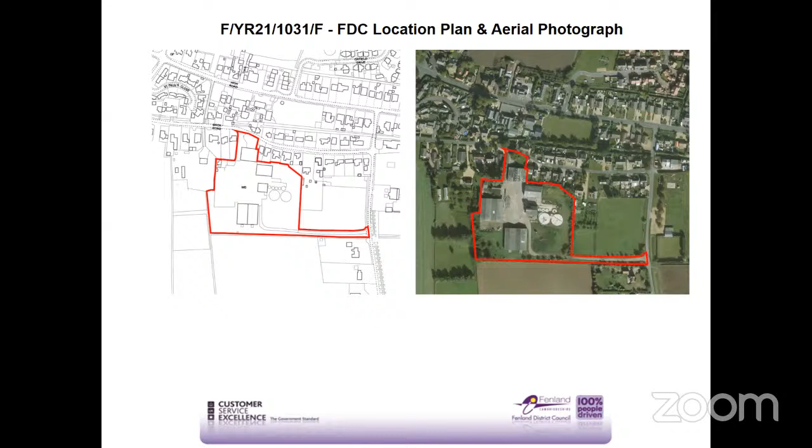The current slide shows the site location in both plan and aerial form. It should be noted that there are two access points to the site, one from Back Road to the north and a single access from Wolf Lane to the southeast, which is to serve one of the proposed plots, that being plot 17. The corresponding location plan submitted by the agent is now on display.

The development proposed comprises a mix of dwelling types served from a main estate road that runs north to south, with private drives extending east and west. Whilst originally concern was raised by planning officers regarding the layout of the upper northeastern quadrant of the site, the agent has reworked this area to overcome these initial concerns, and it is now considered that the layout presented aligns with policy.

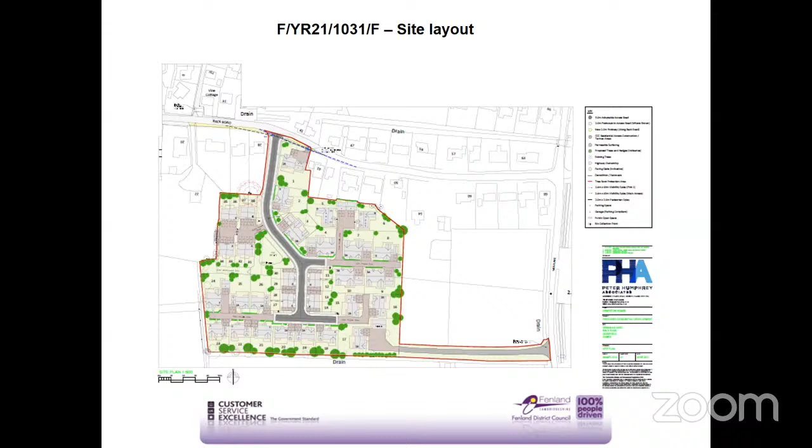Concerns raised regarding highways and access are noted. However, the highways team have not raised any objections to the scheme, and there would be nothing to substantiate a refusal in this regard. It is again noted that the scheme will see the removal of a non-conforming B8 use, which could be resurrected and indeed intensified without recourse from a planning perspective. It is also noted that matters of drainage and biodiversity have been addressed through the evaluation of the scheme, and that there are no technical objections to the scheme from the statutory consultees.

The current slide details the earlier approval for 15 dwellings, which represented a net increase of 14 dwellings on site. This was an illustrative scheme for that quantum of development, which established the principle of residential development on this brownfield land. It is noted that the current scheme proposals do not extend the boundaries of the site; however, they do substantially increase the quantum of development.

Although the settlement hierarchy for Gorefield limits development to that of a very limited nature, normally limited in scale to residential infill, appropriate weight must be given to the brownfield status of the land and the opportunity to remove a non-conforming use from a residential area, as required by the National Planning Policy Framework, which promotes the effective use of land.

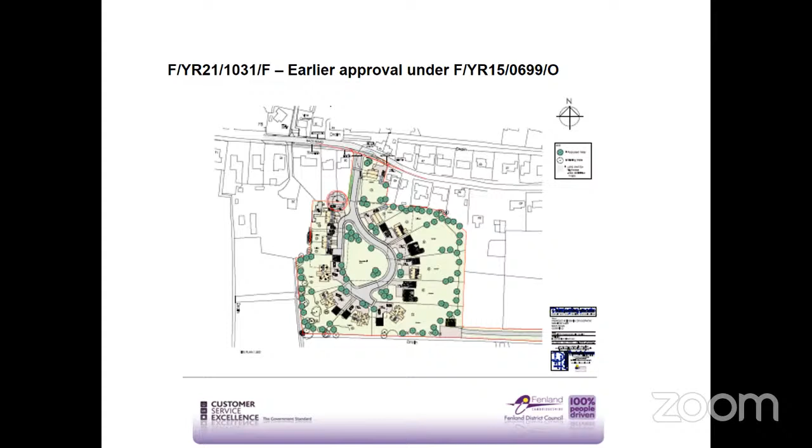Looking at the scheme details, the current slide shows street scene views of the proposed development, capturing a range of two-storey and single-storey dwellings, with the two-storey element delivered as both detached and semi-detached properties. The upper view shows plots 18 to 23, located to the southern part of the site, facing the lower hammerhead and private drive, which extends in a westerly direction.

The second street scene view shows plots 27 to 30, located to the western side of the access, immediately prior to the hammerhead. The third street scene view shows plots 24 to 26, to the northeast of the hammerhead in the southwestern quadrant of the site.

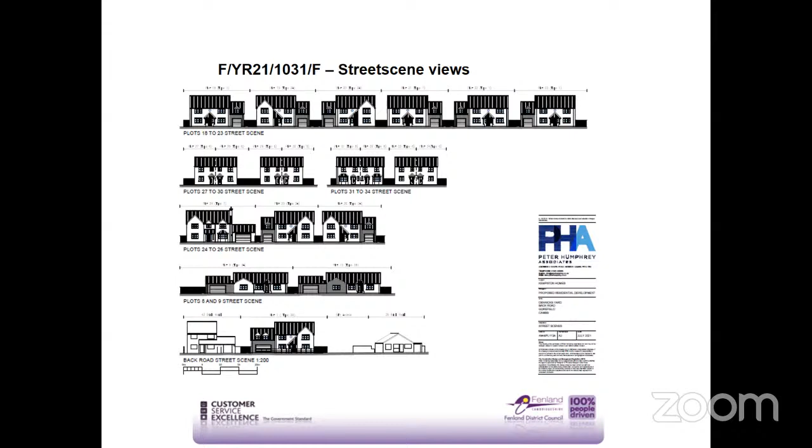The fourth street scene view shows the bungalows to be located to the eastern boundary of the site at the end of the private drive, which runs from the main access to the east. Finally, the lower street scene view captures the view from Back Road frontage and includes plot 1 of the development, which has been approved as a standalone dwelling in late 2021.

The development of this site will see the removal of a non-conforming use within a residential area, which already benefits from outline planning permission for residential development, albeit for a lesser number of units. The current scheme will maximise the effective use of a brownfield site, which is currently vacant. Accordingly, whilst the scheme is not an infill as promoted by policy LP3, there would be no policy justification to resist the application given the weight afforded to the site's redevelopment under the National Planning Policy Framework.

Matters of residential amenity, character, contamination, drainage, highways and biodiversity have been duly considered in accordance with the relevant national and local planning policy framework, and there are no matters which would render the redevelopment of this site unacceptable, subject to appropriate safeguarding conditions imposed to direct the development of the scheme going forward. Therefore, the recommendation is to grant as per pages 44 to 51 of the agenda, with the updated conditions listed on the written update that has been circulated.

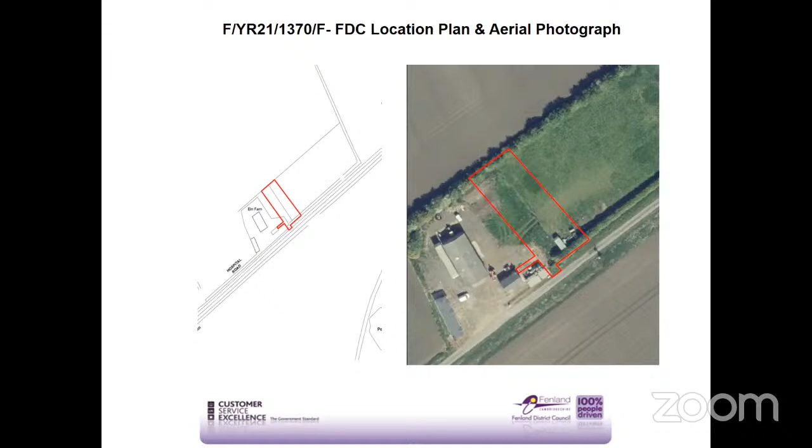There is also an unauthorised mobile home on the site, which sits in the bottom left corner of this group. The site is located within the open countryside outside Doddington, which is apparent particularly from the aerial image.

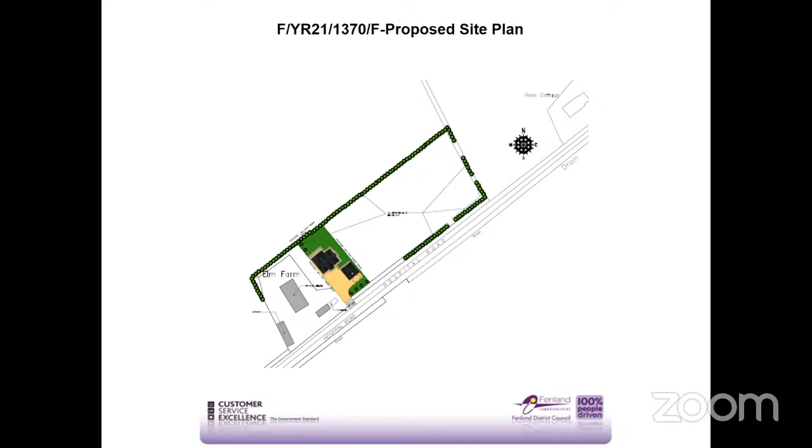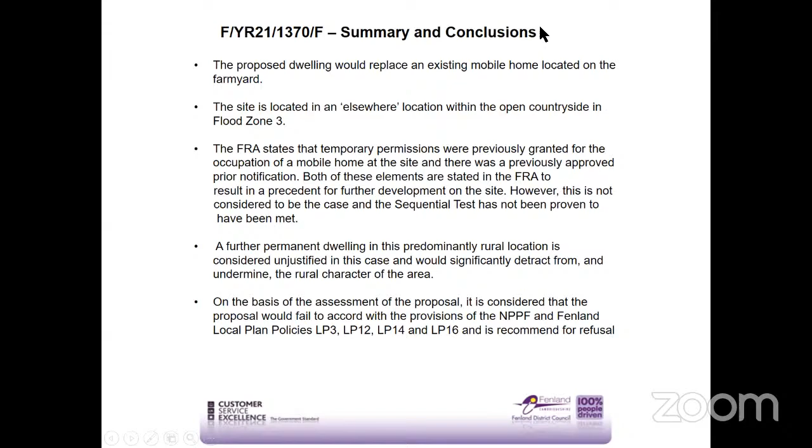Thank you, Chairman. Yes, thank you, David. We have one speaker on this application. I'd now like to invite George Borman, the agent, to make his presentation to the committee. When you're nicely seated, you have 5 minutes. Thank you very much.

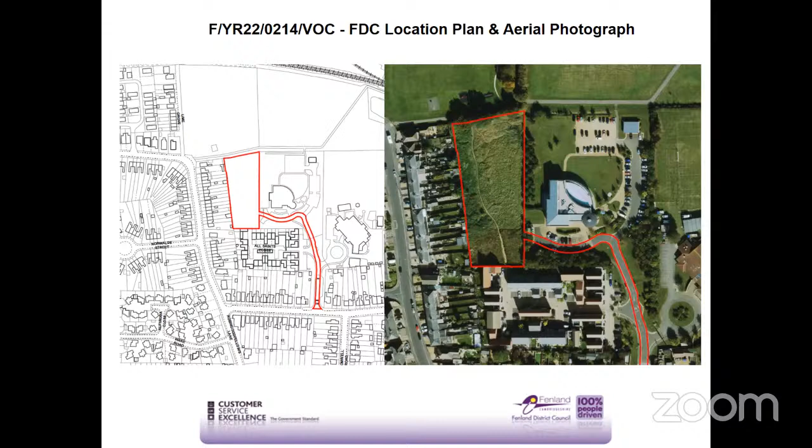The slide currently on display shows the application site boundaries with access derived from the existing access which serves the school, the County Council offices and All Saints Close, an existing housing development. To the west of the site are properties in Robin Goodfellows Lane, and to the north of the site is the park, with All Saints Close to the south and County Council offices to the east.

The application has been submitted under section 73, which allows for minor material changes to an existing approval. In the context of this development, the revisions are considered minor, noting that there is no increase in the quantum of development, no increase in dwelling footprints, or indeed the building envelopes.

It is noted that objections have been received to the proposal. However, these relate to the principle of development, which has already been established under the original consent. In essence, this proposal merely revisits the detailed designs of the dwellings as a precursor to delivering a fully affordable housing scheme.

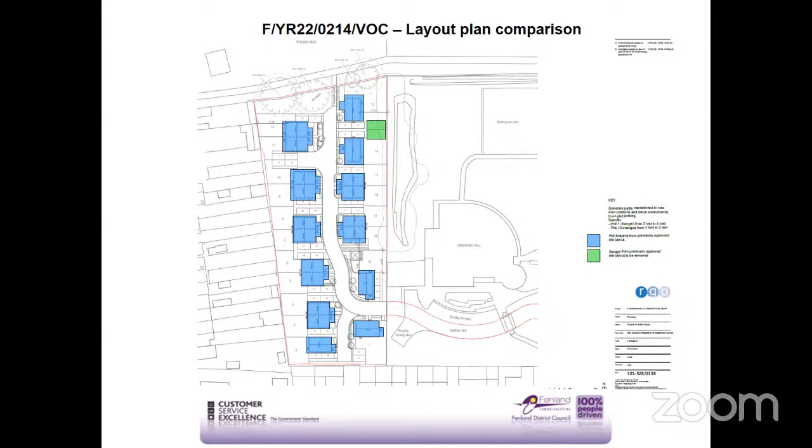As can be seen from the above slide, the site layout remains as per the original scheme, with the road connecting with the existing access to the southern end of the site and as an extension to the existing road serving the County Council offices and traversing in a northerly direction with a turning head to its northerly end. A substation is shown between plots 18 and 19, however this is considered a minor addition in the context of the original approval.

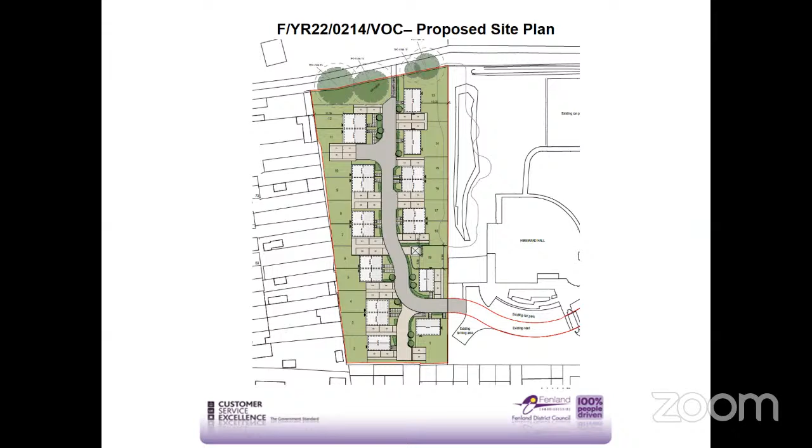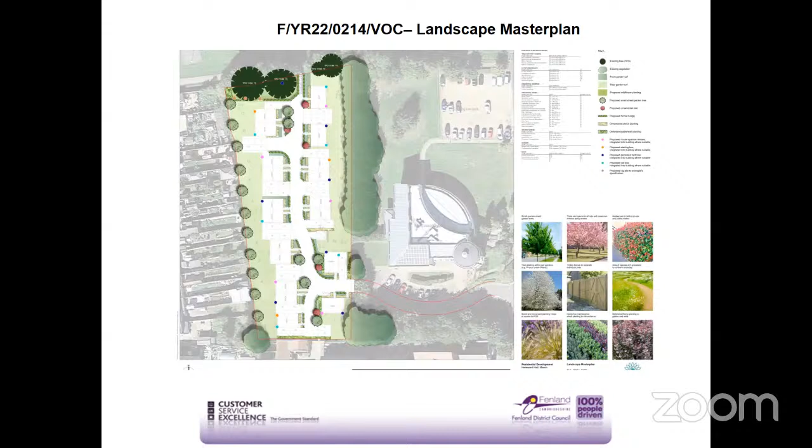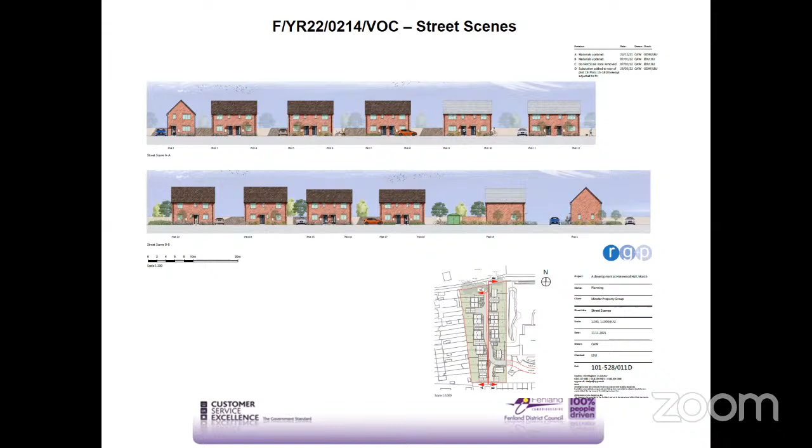There is an extant permission for the site for the same quantum of development, and the changes proposed by this submission are minor material amendments in the context of the approved scheme. The amendments are necessary to enable the housing development to come forward as a fully affordable proposal, and this section 73 application proposes minor changes to the dwelling footprints and designs whilst adhering to the originally approved layout in terms of road layout and technical details. It remains the case that, subject to appropriate conditions, the scheme may be delivered in accordance with the relevant planning policy framework without detriment to the character of the area, residential amenity, flood risk and highway safety.

The comments of the Town Council and local residents are noted. However, there are no material considerations prompted by the revision shown that would warrant any other recommendation than grant. The recommendation therefore remains to grant as per pages 87 to 90 of the agenda.

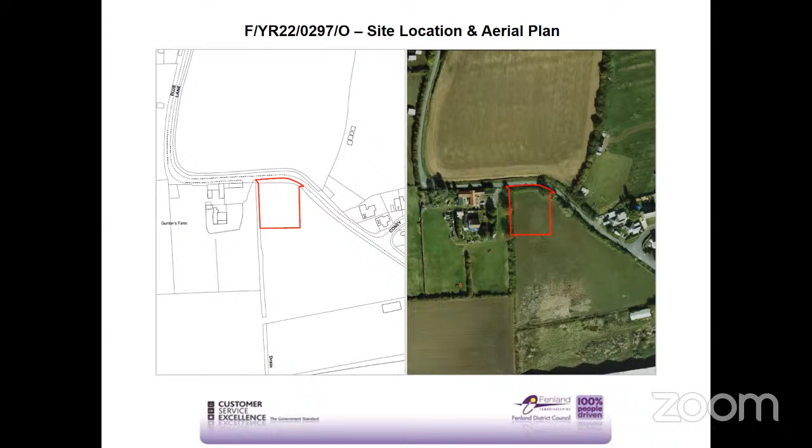The site is shown in red on the location plan and the aerial photo. It sits within the open countryside outside Wimblington. To the west of the site is Gunton's Farm. Across to the east are the last dwellings considered to be part of the built form of Wimblington. On the aerial photo in the bottom right corner is the edge of the Knowles Transport Warehouse, and the land to the north of this is a current application for a car park to serve Knowles, which has not been determined as yet.

To summarise, the application site is located beyond the built form of Wimblington and is therefore considered to be in an elsewhere location. No justification has been submitted which would see the principle of development being acceptable in policy terms. In addition, the development is considered to have a detrimental impact upon the character and appearance of the area, contrary to policies of the local plan and the aims of the NPPF.

An argument has been put forward in the application that the dwelling is required for the applicant to run his business. This is currently based in Whittlesey and will remain in Whittlesey. The business concerns fire and security systems, and as such is not considered to be a rural business which needs to be in this location.

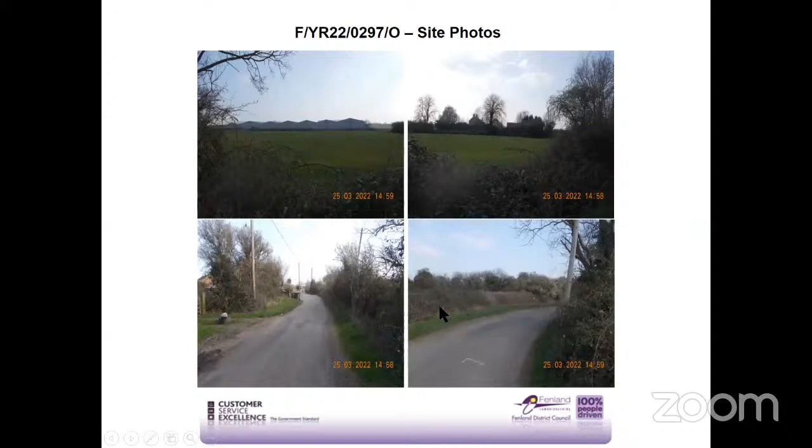So is that purple area the potential new car park? Yes. And the other question: the workshop doesn't look much bigger than a good double garage. It's an outline application at the moment, so all those matters are reserved — we will design the workshop and the home appropriate for Mr. Bridges' needs when we get to that stage. If you want to see the reserved matters application at that time, we'd be more than happy for that.

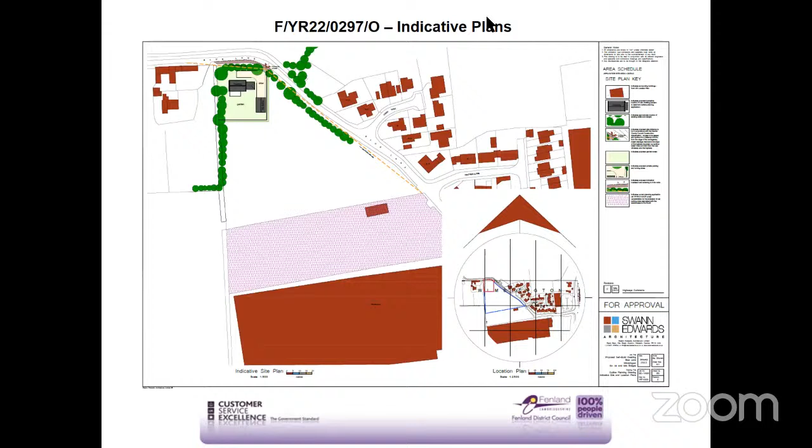Thank you, Chair. Councillor Purser, the floor is yours. Thank you, Mr. Chairman.

We know that Wimblington is not, shall we say, a rough area as such, it's not a bad area. But I didn't recall seeing it mentioned — is part of you actually living on the site part of the security consideration? Sort of with it being safer to be on site for security of the business. Is that part of the consideration?

Yeah, absolutely. As an accredited firm, a lot of what we do has to be controlled — our offices in Whittlesey are monitored, with an alarm and police response. The workshop, if anything is pre-configured, should be kept secure until it's dispatched to site, because if anything is altered it would then need redoing. So it is essential, ideal to be near that equipment.

Finished, Councillor Purser, yeah? Yes, thank you, Mr. Chairman. Sorry — right, anybody else? Any questions before we let those go back to the seats? No? Thank you very much for that, gentlemen. Thank you. Thank you. Just let them get seated and then we'll continue.

Members, any questions or clarifications to officers? No, I can't see any with a burning desire to ask questions to officers, so we'll quickly move on.

Members, I'd like to ask you to debate the item in respect of the material planning considerations relevant to the application. If you'd like to speak, please raise your hand. So who would like to kick that off? Councillor Cornwell, thank you.

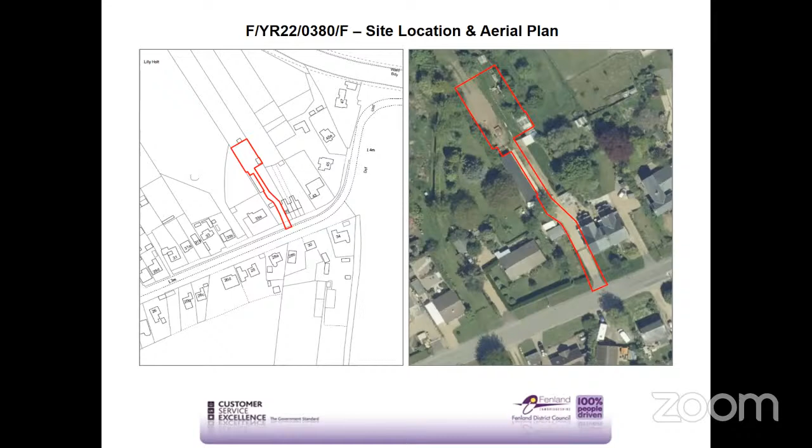The application site is shown in red on the location plan and aerial photo. As you can see, it sits to the rear of the properties on Doddington Road, which are largely in a similar alignment. There was a previous refusal in February this year for an identical scheme. The site is also in flood zone 3.

The application is in full. It's proposed to take access down the side of number 35 and through to the dwelling at the rear, shown in black on the site plan. Immediately to the rear of 35 is a proposed area of car parking for the existing dwelling - that's the first yellow hammerhead. Then there's an area of car parking associated with the actual proposed dwelling.

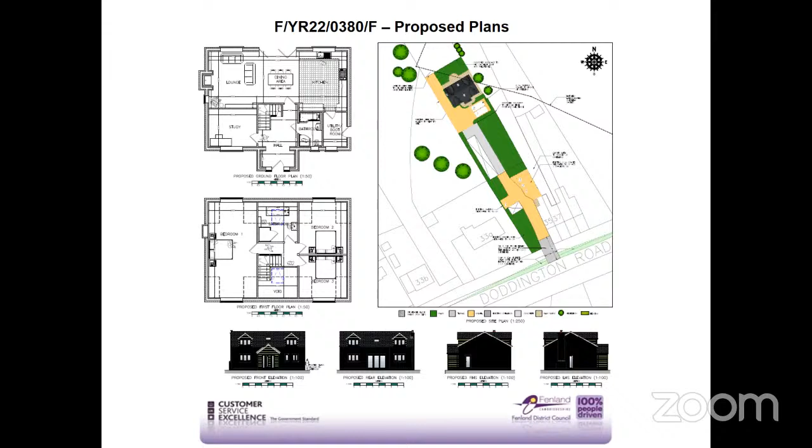The elevations proposed are shown at the bottom of the image. This is a 2-storey dwelling with first floor accommodation in the roof space, essentially giving the appearance of a chalet type bungalow.

To summarise, the application is considered to be backland development, which would be at odds with the prevailing character of the area and would conflict with policies of the local plan in this respect, but also in terms of principle. Benwick is a small village where infill will only usually be supported.

In addition, it is not considered that the site is sequentially acceptable in flood risk terms, as there is an unimplemented planning permission elsewhere within the village which could accommodate this development. Also, no sustainability measures have been submitted which would address the issue of the exception test. Consequently, the application is recommended for refusal as set out within the officer report.

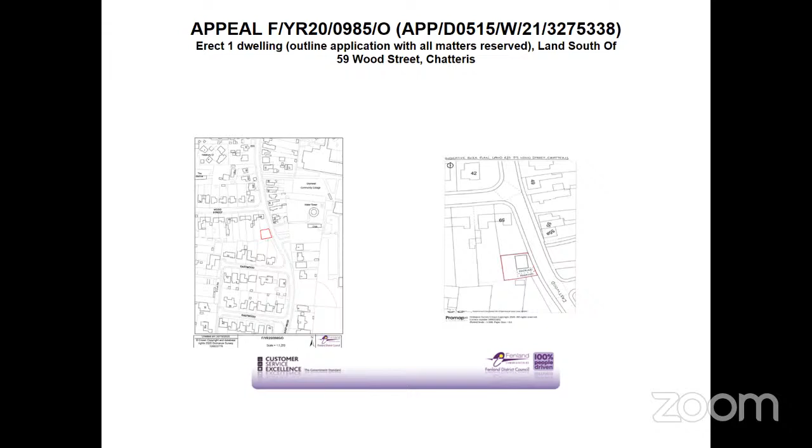Okay, Councillor Bennett. David and I spoke about it because I signed it off, I suppose. David and I were really surprised that application was approved. But we are where we are. Inspectors don't always get it right, no more than we do, do they? So, thank you.

The next appeal decision relates to a Class Q barn conversion at Willow Farm, Euximoor Drove, Christchurch. This was refused on the basis that the extent of works were considered to go beyond those which could be considered a conversion and amounted instead to a new build. However, the inspector concluded the works were within the scope of a conversion and allowed the appeal accordingly. That decision was perhaps made on the basis of additional structural information submitted during the course of the appeal, and the council made a cost claim on this basis, which the inspector did not allow, as he considered the council had not been put to unnecessary or wasted expense, despite the fact the appellant said the council, if they'd had this information, may well have considered things differently.

Any questions, members, on that appeal decision? Yeah, we are. Carry on, David, please.

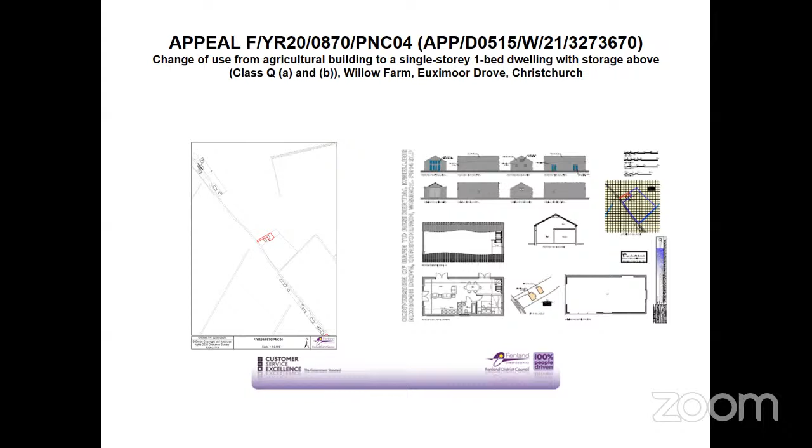The next decision was at 16 Perry Road in Leverington. This was an application for a single dwelling in between pairs of semi-detached properties. The inspector considered these pairs of semis provided a defined character which the development would conflict with, and that this impact would be exacerbated by its height and design. The appeal was therefore dismissed. Members, any thoughts on that one? No? Right, David, we're going on well here.

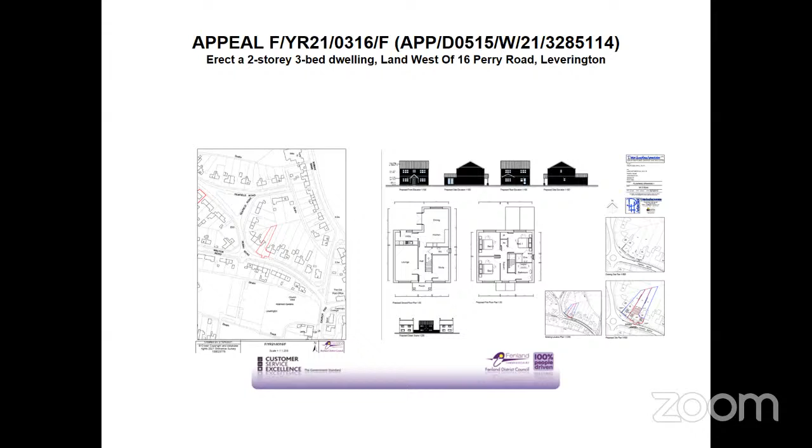Thank you. So the next one is actually a committee decision. Members may recall this permission in principle at The Rectory, Benwick, being refused at committee back in the autumn of 2020, in accordance with officer recommendation. The inspector concluded the site was in an elsewhere location, not within the built form of the settlement, and in particular noted that a site could be considered in general terms to be part of the village, but not be in the village for the purposes of the spatial strategy, which I think is quite a key decision for interpreting the relevant policies of the local plan. As well as this principal issue, she also considered the development would have an urbanising effect on the character and appearance of the area. Given the site was in an elsewhere location, it failed sequentially from a flood risk perspective. Other matters were also considered at the hearing, including the issue of 5-year land supply and the benefits the application could potentially bring to Benwick and its sustainability. But the outcome was that the harm identified outweighed any benefits in the inspector's view, and the appeal was therefore dismissed.

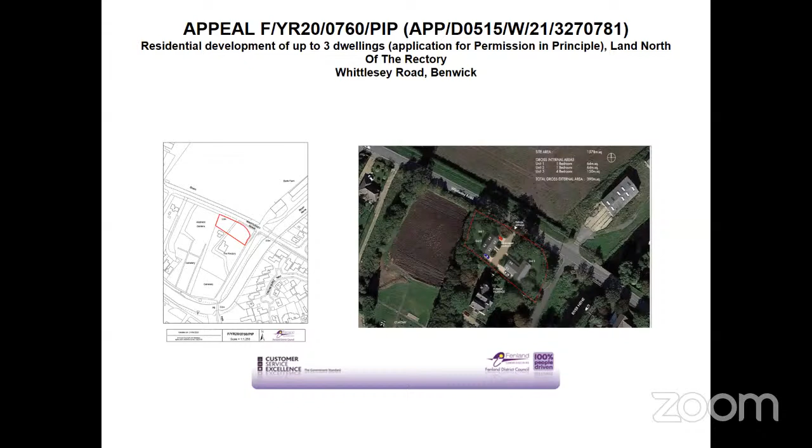The committee got that one exactly right as far as the inspector is concerned, which is a good thing. So David, after you again, thanks.

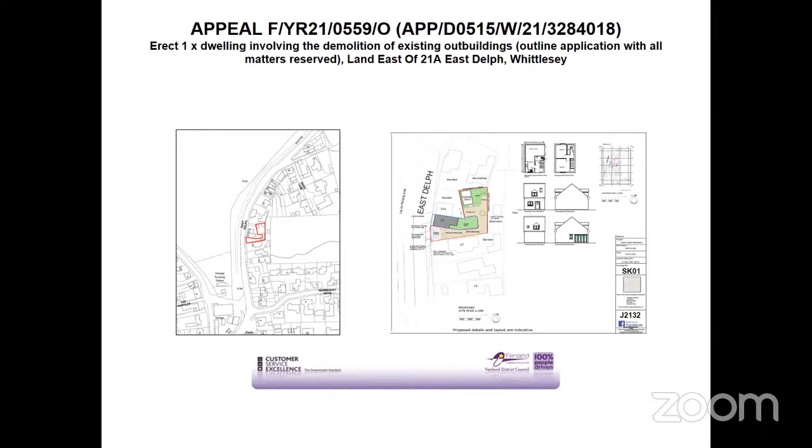To move on to the final one, this was an application at 21A East Delph in Whittlesey to erect a single dwelling. The inspector considered the indicative development would not have an acceptable impact on surrounding dwellings and dismissed the appeal on this basis. The inspector did consider car parking, although it wasn't part of the reason for refusal, and concluded one space would be acceptable in this accessible location, but as I say, the appeal was dismissed. Have you got any comments on that one? No. So that, thank you, David.

So we won 3 and lost 2 on that. So that's not bad, is it? It wouldn't be championship standard, would it? But we'd be in the top 6, no doubt, on that one if we were playing football, wouldn't we?